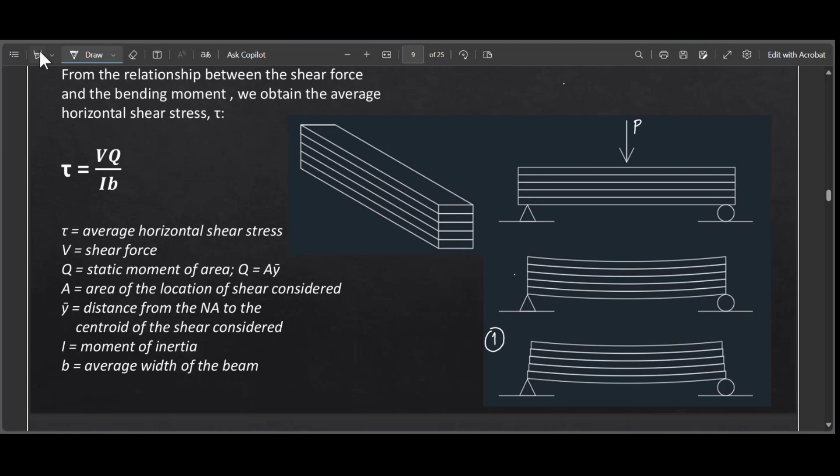Let's zoom in. The individual wood planks will resist the load independently, each on their own. They will slide over each other. If you notice here, the bending of our planks is not even because they are just sliding over each other. Therefore, there is no resistance between them since there's no glue. Since there's no resistance, there is little or no shear transfer between each layer because they are not bonded.

In the second scenario, let's now put glue on the wood planks. Now that you've added glue, they will act as a single entity, like a solid beam. So the glue transfers the horizontal shear between the layers. It bends now.

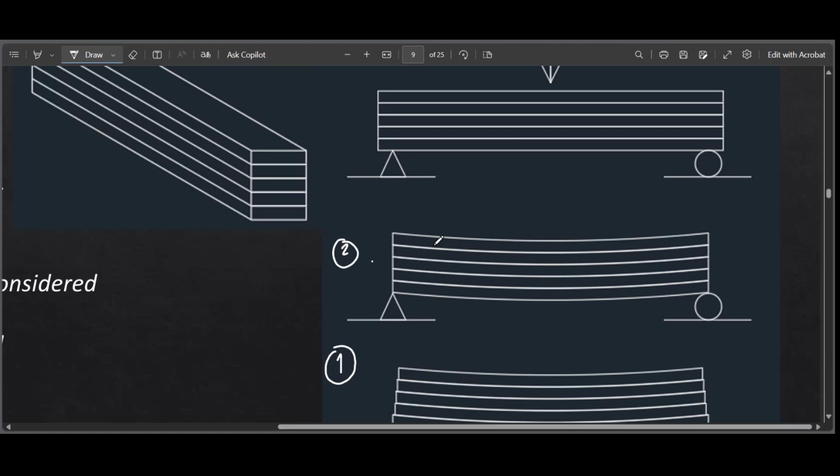Since they are glued to each other, the load is transferred to the wood planks, and there will be resistance between these planks because of the glue. Therefore, with resistance between the layers, we now have what we call stress, or shear stress. This will act as a single solid beam, and the glue transfers the horizontal shear between the layers. So in practice, it's more advisable to use solid sections compared to built-up sections because of these scenarios.

If we say solid beam, for example we have an I-beam or wide flange, it acts as a single entity, so it is solid, made as a solid. If we say built-up, there's a connection between the flange and the web.

For example, here you use a plate for the flange and another plate for the web, and another plate for the bottom flange. This is what we call a built-up connection. So there is a connection or an interface between the flange and the web. To make sure this section is strong, the connection must be well-designed.

This is so it doesn't slide or slip. Because if there's sliding or slipping, there is no shear transfer when we apply loading. Unlike when it's solid, it will act as a single entity, so the material will resist the shear as a solid, what we call a monolithic unit.

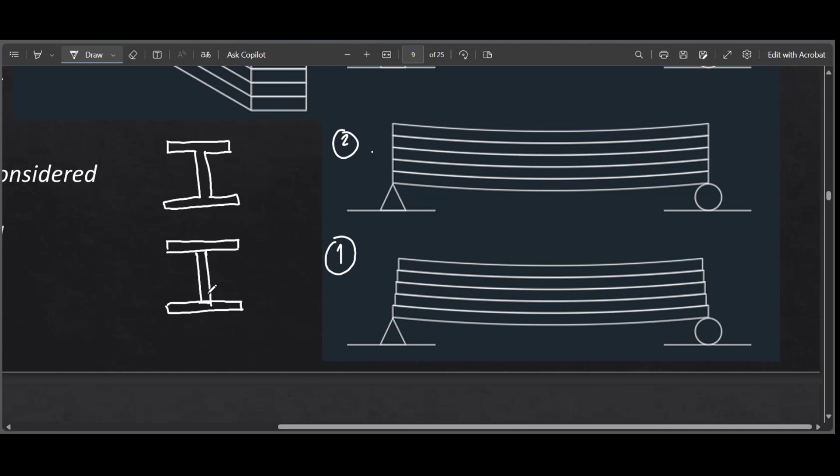I'm not saying it's not allowed to use built-up sections. We just need to make sure that the connections, usually welded, are well-connected so that when we apply loading, they are able to resist any sliding. The problem is, if it's not well-connected, once you apply force, it will slip or slide. There will be sliding in these parts. So that's what we call horizontal shear stresses at these interfaces.

Now, what about what we call vertical shear stress?

So, yung vertical shear stress, yun yung typical, di ba? Naglagay ka ng load dyan, force P. Kailangan niya ng magre-resist for that sliding. So, yan yung vertical shear force. Therefore, pag merong shear force dito, matik meron dyang stress, shear stress.

So, vertical shear stress. Pag horizontal shear stress naman, dito, yung mga nag-a-act between the layers. Okay? So, those are the two types of shear stress in our beam.

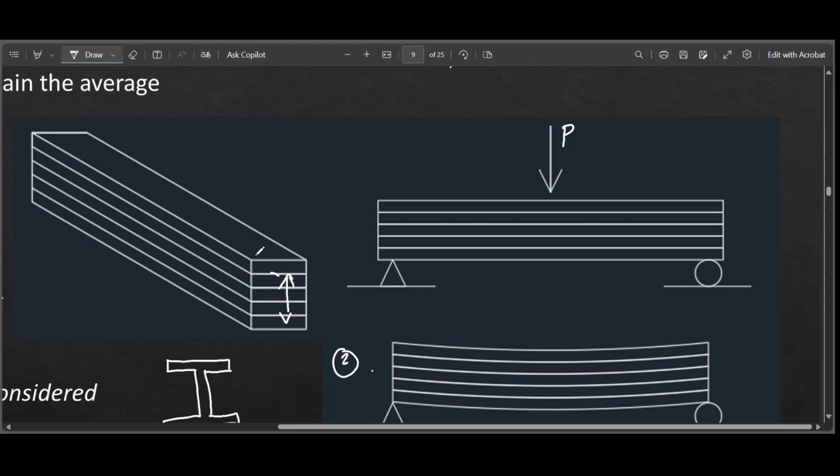Okay, so through derivation, nagkaroon po tayo dito ng equation or formula na gagamitin natin to compute for the average horizontal shear stress in the beam. Okay, so nanggaling po to sa integration. So hindi ko na po i-discuss.

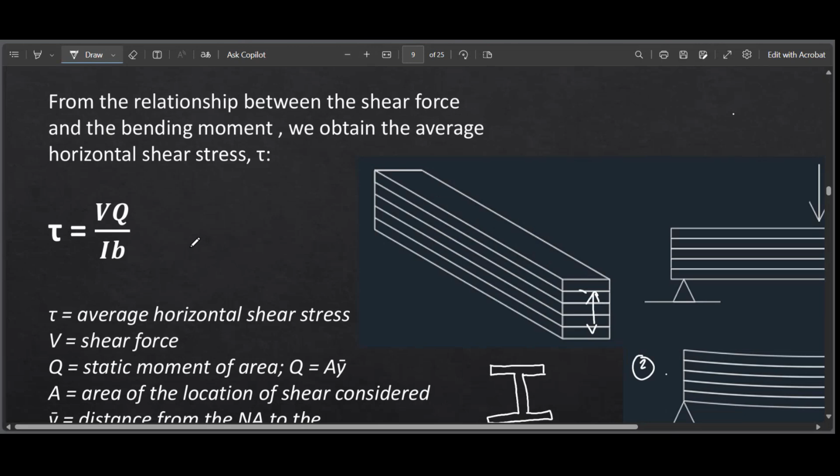So, we have here the average horizontal shear stress formula, or the shear stress formula for simplicity. It is equal to the shear force multiplied by the static moment of area, on which yung Q natin, the static moment of area, is equal to AY bar.

So, A here is the area of the location of the shear considered, and Y bar is the distance from the neutral axis to the centroid of the shear considered.

Okay, so kunwari, ito, gusto nating makuha yung horizontal shear stress dito sa part na to, dito. Ayan, so ang gagawin natin is, sige, drawing natin, sige, dito na lang.

So, kunwari, gusto nating kukunin yung horizontal shear stress on this part. Okay, so ang gagawin natin dito is to consider muna kung nasaan yung neutral axis. So, around here. Yan, neutral axis.

So, since ito yung kino-consider natin na area, shade natin yan. Okay, from that point, tapos dun sa taas niya. And then, if we want to get the static moment of area, we just need to multiply the area of this one. Ito, area, this shaded area.

So, from this point, dun sa taas niya, multiplied by Y bar. So, yung Y bar natin is from the neutral axis papunta doon sa centroid nung kinukuha nating area. So, around here. Dito sa centroid niya. Okay, so yan yung Y bar. That is the static moment of area.

Okay, now pag ito naman yung gusto mong kunin ngayon, for example, dito, gusto mong kunin yung horizontal shear stress on this part. So, ang gagawin mo is to get the area of this one, area, multiplied by the Y bar.

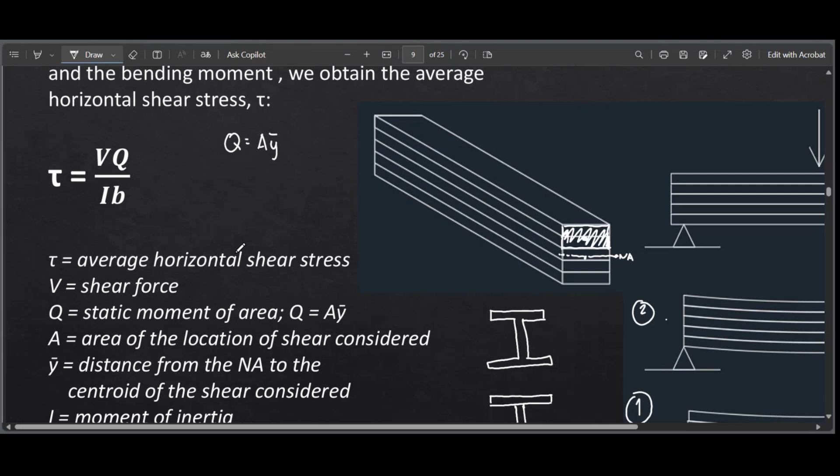Okay, now tignan natin kung paano naman yung distribution of the stress, or yung tinatawag natin na stress diagram doon sa beam natin. Okay? We know na pag flexure yung pinag-uusapan, di ba?

Pag flexure yung pinag-uusapan, ganito yung nagiging stress diagram niya. Okay? We know that the maximum stress occurs at the outermost fiber and then 0 doon sa neutral axis pag flexure. So, paano naman if shear stress yung kinukuha natin.

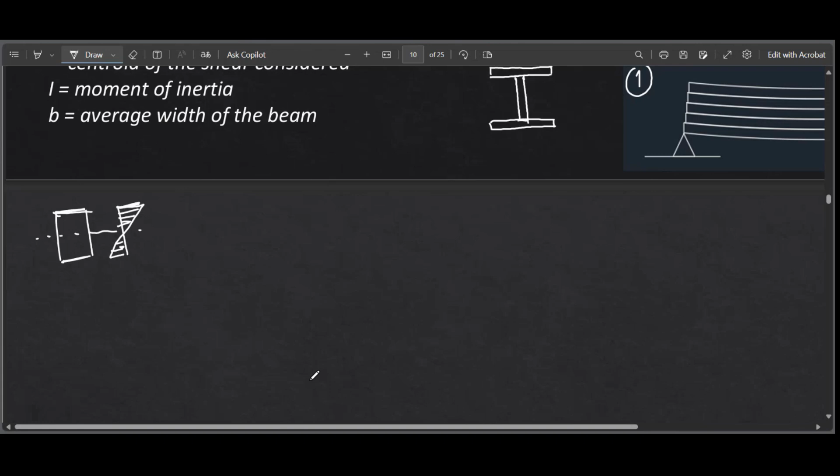Okay, so let's consider here a rectangular section. Apply natin yung formula. So, this is our base and then height. Kuha tayo ng, okay, sample dito.

Ito yung kukunin nating horizontal shear stress. Okay, so shade natin yan. Tawagin din natin ito ngayong, this is our Y.

So, yung Y, this is Y, not Y bar. Ang Y natin is from the neutral axis papunta doon sa kinukuha nating area. Okay, dito sa part na to, Y. So, this one is our H all over 2.

Okay, so apply natin ngayon yung ating formula. This is equal to VQ all over IB. Okay, so yung Q natin, sige, dito muna, VIB. So, yung Q natin is equal to

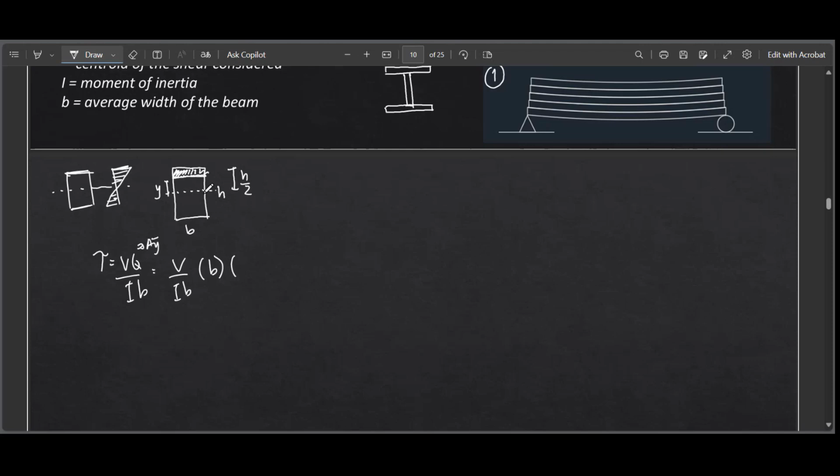AY bar. So, the area of the shaded one. So, this is B multiplied by, ano yung height niya? The height is H all over 2 minus Y. Again, H all over 2 minus Y. H all over 2 minus Y. Okay? So, that is the area.

And then, ano yung kanyang Y bar? Y bar is from the neutral axis papunta doon sa centroid ng shaded. Therefore, we have Y plus, okay, Y plus, ano yung distance na yan? We have H all over 2 minus Y divided by 2. Okay? H all over 2 minus Y divided by 2. Okay? So, yan na yung Y bar natin. Okay? So, let's simplify.

So pwede na nating i-cancel to ngayon. Tapos pwede nating ilabas yung 2. This one, the denominator, so V all over 2I. And then ayusin natin yung mga natira sa loob. We have H all over 2 minus Y, and then we have here Y plus

Wait lang, hindi pala pwedeng i-direct. Hindi pala siya kasama doon. Wait lang, hindi pa natin pwedeng ilabas ng basta-basta si 2. Ayusin muna natin yung fourth term.

This one, simplify natin ito. So simplify muna natin to. So magiging 2y plus h all over 2 minus y, right? Divided by 2. Tsaka natin ngayon ilalabas yung 2.

So magiging v all over 2i multiplied by, cancel na yung b dyan. So we have h all over 2 minus y. And then natira yung numerator, we have 2y minus y, so y plus h all over 2.

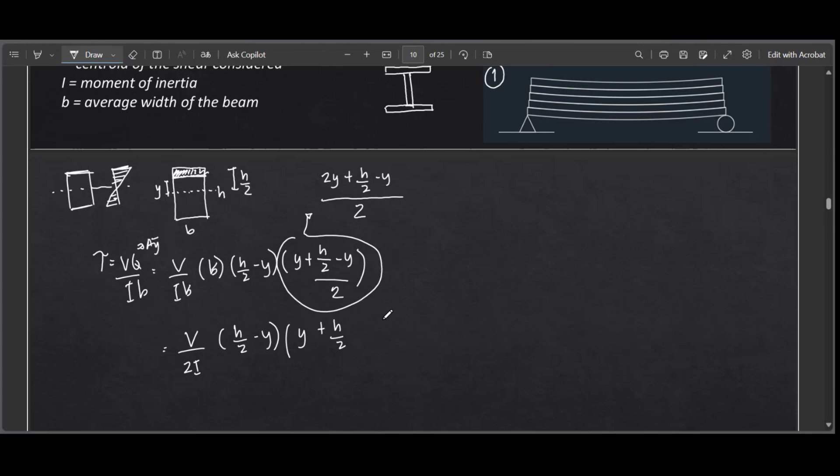Okay, sige, ayusin natin para same. So magiging v all over 2i. Ayusin lang natin, we have negative y plus h all over 2, tapos y plus h all over 2.

Okay, so distribute natin or expand natin yan. So magiging negative y squared plus hy all over 2 minus hy all over 2 plus h squared all over 4. Okay, so cancel out yan. Cancel out, therefore magiging v all over 2i multiplied by h squared all over 4 minus y squared.

Okay, so the term in y is in squared. Ibig sabihin, the stress varies parabolically sa section natin. Okay, again, the term in y is in square. Ibig sabihin, the stress varies parabolically sa section.

So, if i-drawing natin yung magiging stress diagram in terms of shear, ganito po yung mangyayari. Okay, so from this point, drawing natin dyan. So parabolically, ibig sabihin parabola, okay? So ganyan yung magiging stress diagram.

Ibig sabihin, the maximum shear stress will occur at, saan? Sa may neutral axis, dito natin makikita yung maximum shear stress. And then, habang lumalayo tayo sa neutral axis, lumiliit din yung ating shear stress. Okay, bakit? Okay, so tingnan natin.

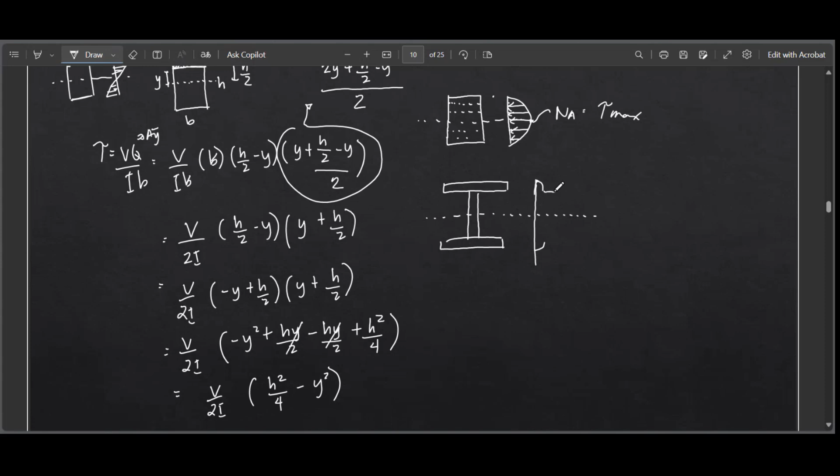Okay, kaya yung magiging stress diagram of our I section. Okay, so yung mga I-beams natin, they are perfectly manufactured to resist bending. Yung flange niya will resist the bending. And then, yung kanyang web will resist the shear stress.

Pero yung ating rectangular sections, yun nga, as we have discussed doon sa previous topics, they are inefficient in terms of bending, but the design is good for shear. Okay, kasi alam natin na dito sa may neutral axis, doon nangyayari yung maximum shear stress.

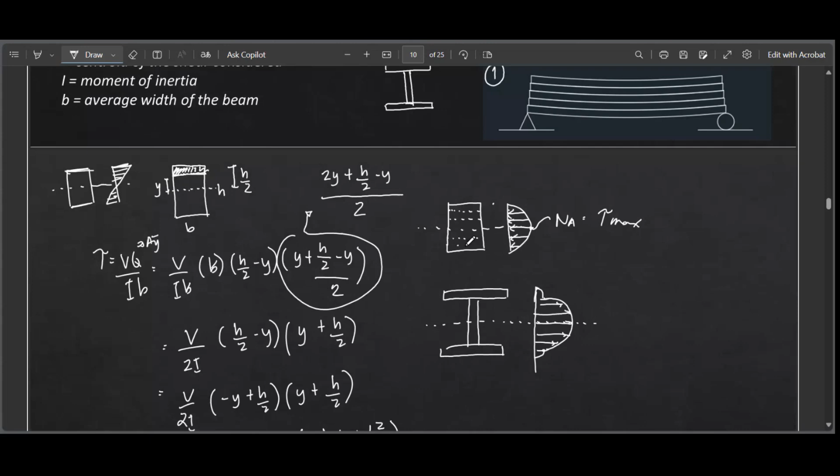Okay, and then we also have specific formula na pwede natin gamitin sa rectangles. Okay, so ito kasi yung general formula, pwede niyang gamitin for any section, but there is a specific equation for rectangle. Okay, so let's have here a rectangular section. Ayan, so kung gusto natin kunin yung maximum shear stress, alam na natin na nasa neutral axis yan, di ba? So ang i-consider ngayon natin na area is ito.

Because of the illustration we mentioned earlier, the maximum shear stress will happen at the neutral axis. So this is the area we'll consider now. We have B times H all over 2. So let's apply VQ all over IB.

So we have V, and Q is AY bar. What's the area? We have B multiplied by H all over 2. And then Y bar now is from this point going to here, that is H all over 2 divided by 2, or in other words, H all over 4.

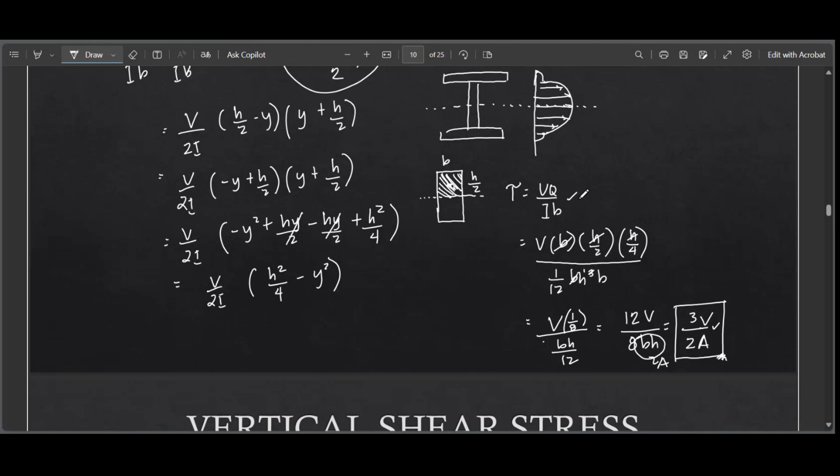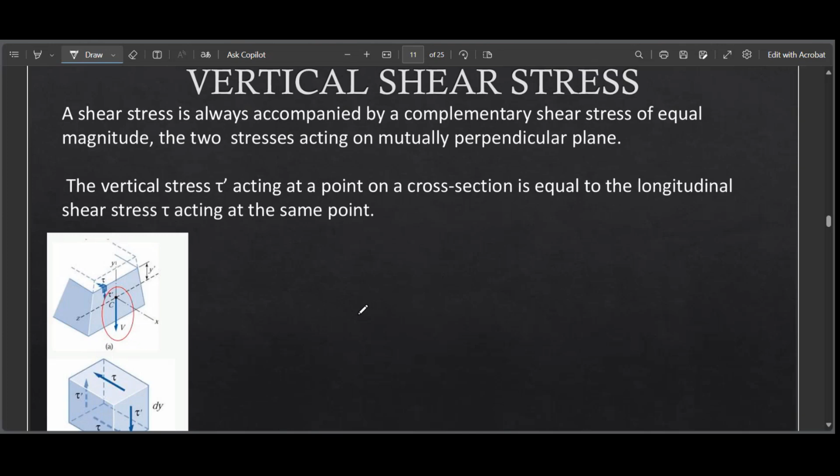So let's proceed to vertical shear stress. A shear stress is always accompanied by a complementary shear stress of equal magnitude. The two stresses act on mutually perpendicular planes. And the vertical stress tau prime acting at a point on a cross section is equal to the longitudinal shear stress tau acting at the same point. Let's explain that through this simple illustration.

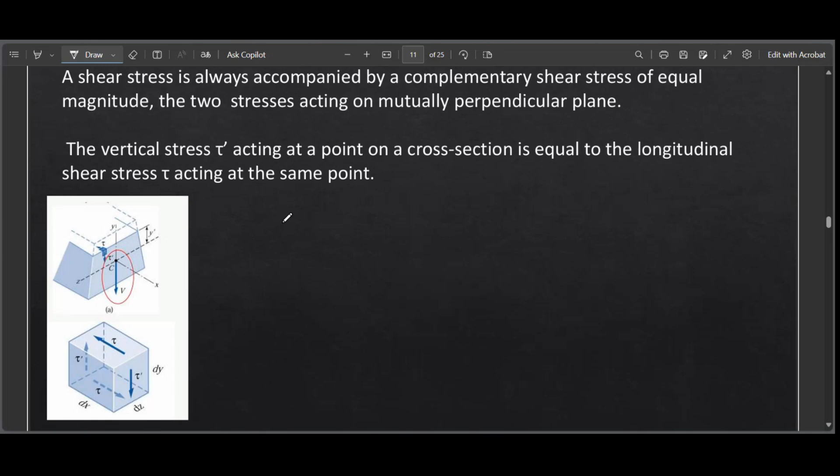So we have here a section of the beam, and we have a shear force. Let's take a sample, a small differential sample from our section. Here it is, let's zoom in, this is what we'll see. A vertical force is applied here, so automatically we have a vertical shear stress. Let's simplify this so we understand better, since we'll derive here the relationship of horizontal shear stress with vertical shear stress.

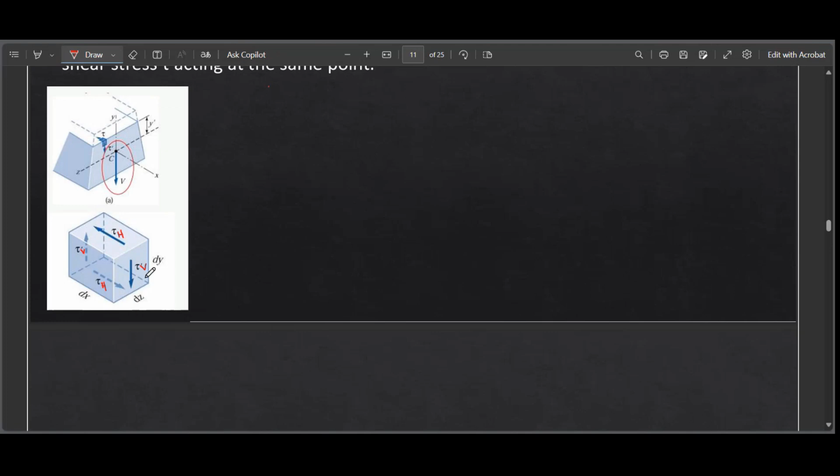Let's call this tau V for vertical, and tau H for horizontal shear stress. Since we want to maintain equilibrium, there should be a force here that is different in direction. And we also have here a horizontal shear stress, of course they differ in direction.

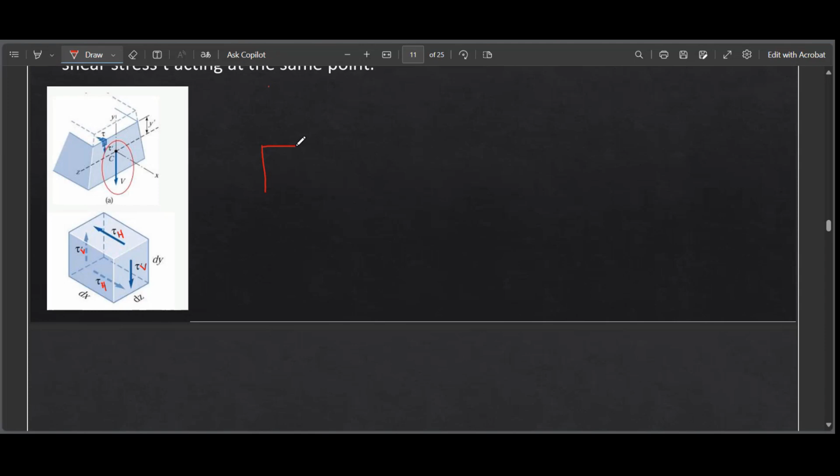Let's convert this to a stress block. That's called a stress block. Let's convert the stress block into their respective forces. Stress is equal to V over A, right? So we have stress, I need to convert it into the vertical force, or I mean the shear force. So the formula becomes tau multiplied by the area.

Let's start here. We have the horizontal shear stress multiplied by the area that is parallel to this one. Here are the dimensions: dx, this is dy, and this is dz. So what's the area parallel to our horizontal shear stress? We have dx multiplied by dz. Of course these are the same here, just different in direction.

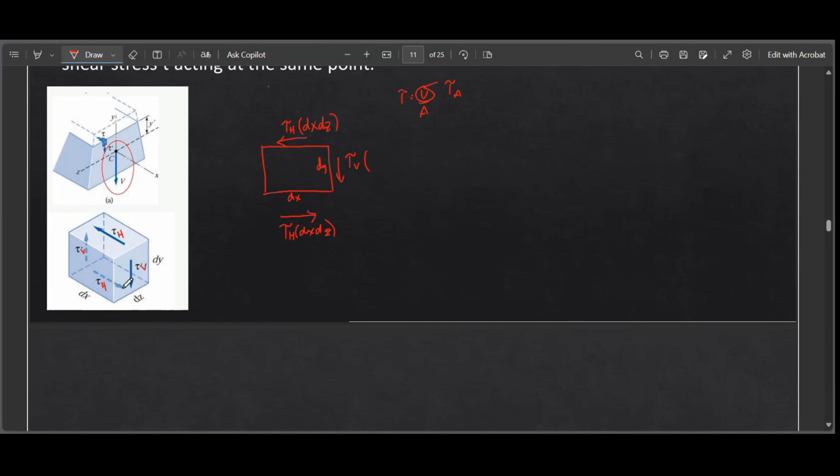Next, for the vertical shear stress, we have tau V multiplied by the area parallel to this one, which is dy, dz. And of course, same here.

Okay, so let's take a moment at any point dito sa ating block. Kunwari, kukuha ko dito ng point A. Pwede rin dito, dyan, or anywhere. Basta meron kayong reference point.

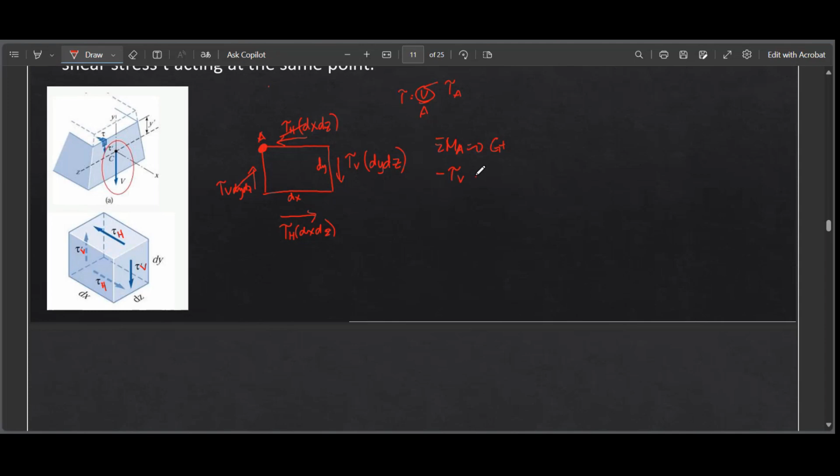Okay, so kunin natin yung moment dyan. Summation of moment at point A is equal to 0. Counterclockwise positive, so automatic magka-cancel na yan, di ba? Magka-cancel yan, so meron tayong natitirang dalawa. So unahin natin ito. We have negative tau v multiplied by dy dz. Ano yung kanyang moment arm?

We have dx. And then this one, plus tau h dx dz, moment arm is dy, is equal to 0. Okay, so transpose natin sa kabila yung isa. So we have tau h dx dz dy is equal to tau v dy dz dx. Okay, so kung makapansin nyo, parehas lang ito, di ba?

Ayan, no? dy dz dx. dy dz dx, parehas sila. So we can cancel it out. Therefore, our horizontal shear stress is just equal to our vertical shear stress. Okay, so parehas lang po yung value ng magiging horizontal shear stress natin versus the vertical shear stress.

Okay. Basta yung vertical shear stress, it is often caused by external shear forces, and na-observe natin siya sa cross-section. Okay, and yung sa horizontal shear stress naman, usually nag-act siya parallel to the beam length or doon sa mga interfaces ng mga fibers. Okay, so internal distribution of shear naman yung na-experience yan, and yun nga, it occurs at the interfaces between the beam layers. But overall, parehas yung magiging value of the shear stress, vertical and horizontal.

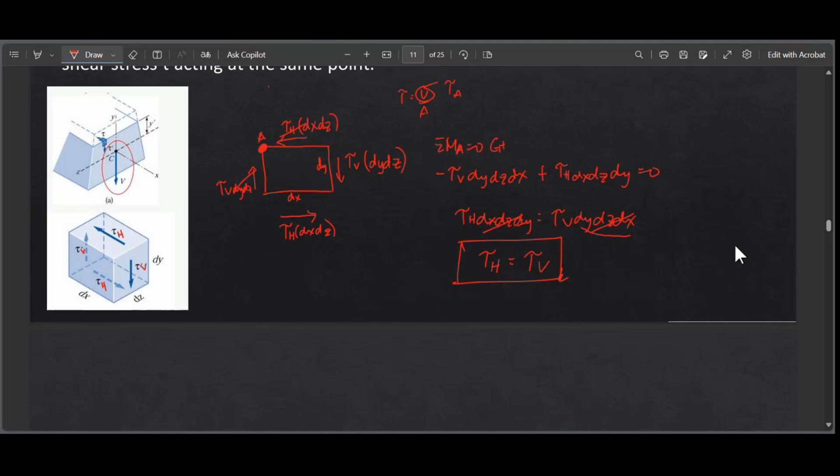Okay, so let's proceed now to the limitations of the shear stress formula. Okay, so the shear stress formula predicts that the largest shear stress in a prismatic beam occurs at the cross-section that carries the largest vertical shear force, V.

Okay, so yung VQ all over IB natin, ang gagamitin nating V dito is the largest vertical shear force, or yung Vmax. Okay, naaral naman na natin yan sa chapter 4, usually the shear or the maximum shear stress occurs at the support. Okay, at the support or near the support.

Okay, so the location or the value of Y of the maximum shear stress within that section is determined by the ratio of Q all over B. Q is always maximum at Y is equal to 0. The neutral axis is usually a candidate for the location of the maximum shear stress.

Okay, nasabi natin kanina na yung ating maximum shear stress will happen at the neutral axis. Therefore, yung Q na gagamitin natin is at the largest, kasi ito na po yung Q, di ba? So ito na yung pinaka-maximum na area na po pwede natin i-consider.

Okay, and then however, if the width B of the neutral axis is larger than at the other parts of the cross-section, it is necessary to compute tau at 2 or more values of Y before its maximum value can be determined. Okay, so very specific to doon sa mga built-up section. Ito yung mga sections na hindi pantay-pantay or hindi pare-parehas yung magiging width of the beam. So pag ganon, we need to consider 2 or more locations ng possible location of those maximum shear stress.

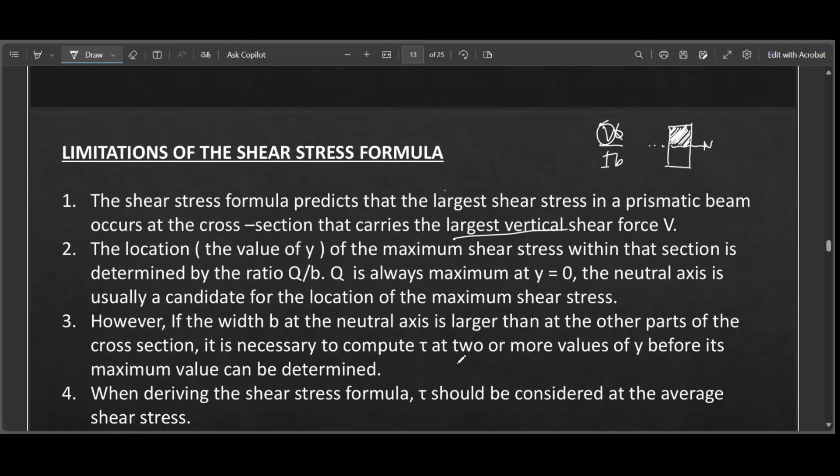Okay, so for number 4, when deriving the shear stress formula, tau should be considered at the average shear stress. And then the shear stress formula is sufficiently accurate for rectangular cross sections and for cross sections that are composed of rectangles such as W and S shapes. For other cross-sectional shapes, the formula must be applied with caution.

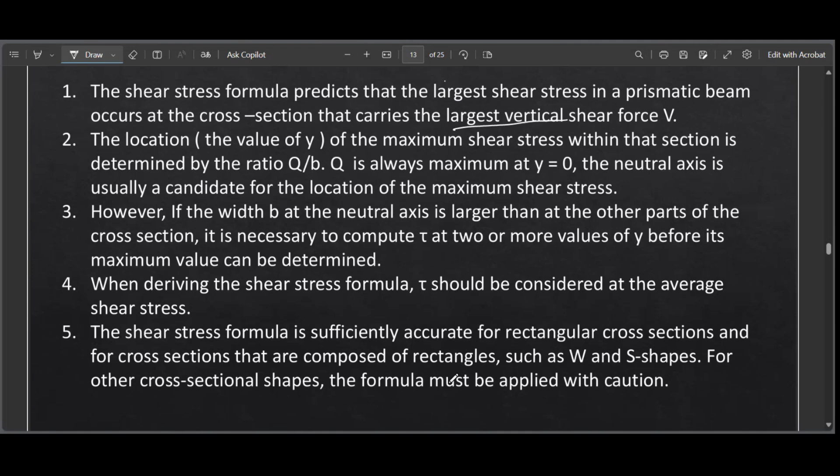Okay, so yung shear stress formula is well-designed for rectangular and then sa mga regular shapes natin that are composed of rectangles. But then again, we can also use that for any other cross-sectional shape. Basta tignan natin ng maayos kung saan yung maximum V or maximum stress na mangyayari, kasi iba-iba sila ng width B. Okay, i-determine natin yan mamaya sa example.

So we have here a simple procedure for the analysis of the shear stress. For number 1, use equilibrium analysis to determine the vertical shear force V. Okay, so isulat muna natin yung equation.

So, the average horizontal shear stress is equal to VQ over IB. Use equilibrium analysis to determine the vertical shear force acting on the cross-section containing the specified point.

Using the shear diagram, or if you're already familiar with the exact location of the maximum shear force, then you may also use a section.

Locate the neutral axis and compute the moment of inertia of the cross-sectional area about the neutral axis. Then compute the first moment Q of the cross-sectional area that lies above or below the specified point.

So Q is equal to A times Y bar, that lies below or above the specified point.

If we have a rectangular section, this is the neutral axis. This is the stress diagram. The stress is the same here compared to the one below, as long as they have the same Y bar - same as with flexural stress. So whatever the stress is here, as long as it's the same distance Y, it's the same. So you can consider the area above or below - it's up to you.

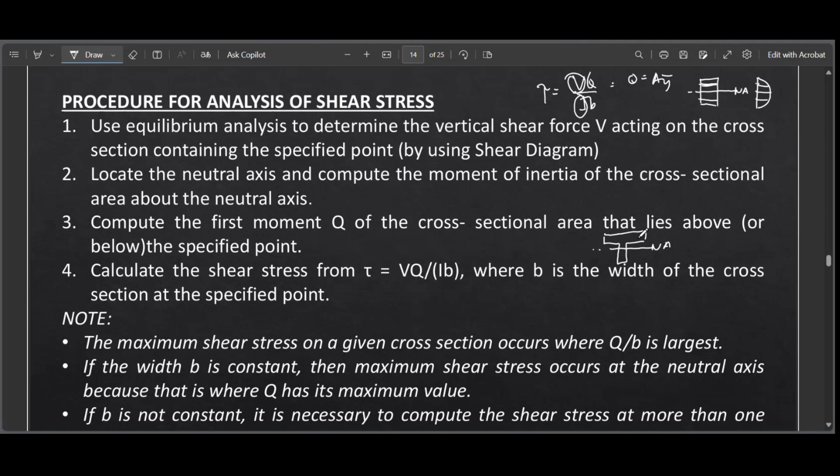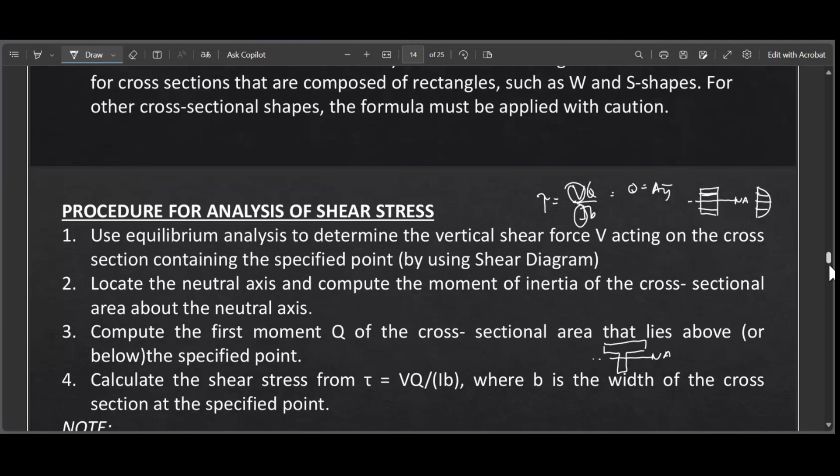We have here some reminders to consider. Number 1: the maximum shear stress on a given cross-section occurs where Q over B is largest - usually the ratio that gives the biggest value is where maximum shear stress occurs. And if the width B is constant, then maximum shear stress occurs at the neutral axis because that is where Q has its maximum value.

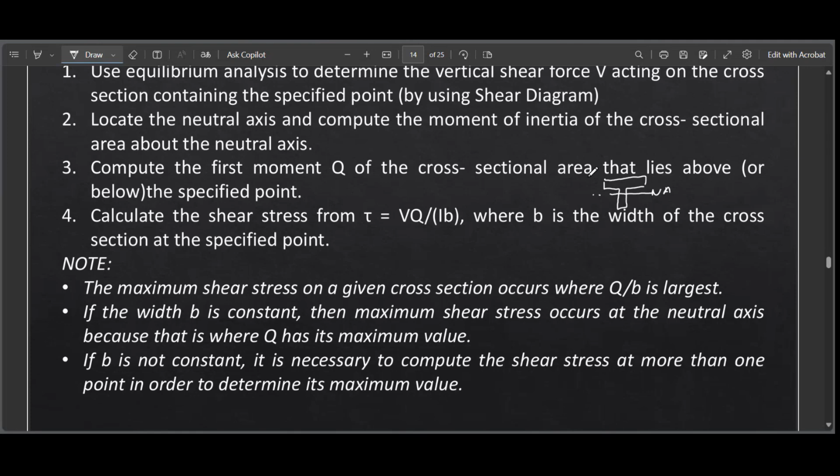And if B is not constant, it is necessary to compute the shear stress at more than one point in order to determine its maximum value. So that's it - let's have now our sample problem 1.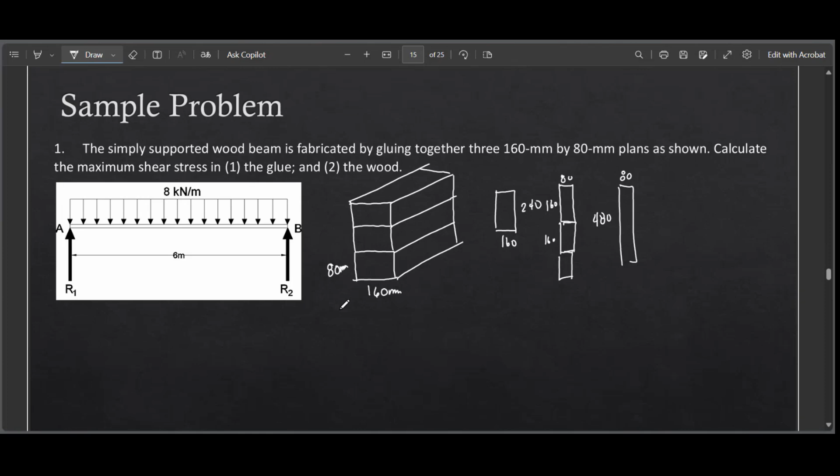Now we're asked to find the maximum shear stress at the glue - meaning at this part where we'll place the glue, on this side or that side. And the wood - meaning we'll consider it as a whole entity. Let's start with the first one, the shear stress at the glue. Our formula is tau equals VQ over IB.

So we need to determine the maximum shear force, Vmax. We have here the reaction - what is the reaction there?

Again, this is a simply supported beam with uniformly distributed load. So we divide the load equally. 8 kilonewton per meter multiplied by 6, so 48 divided by 2, giving us 24 kilonewton, 24 kilonewton.

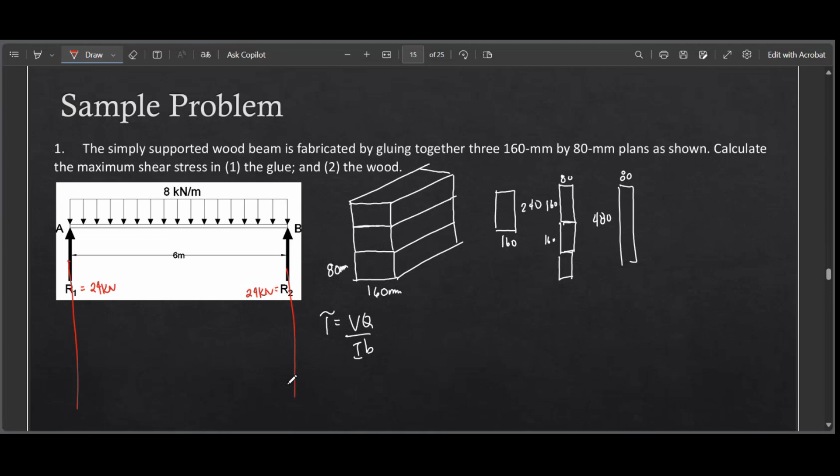So let's draw the shear diagram. Actually we already know where Vmax will happen - it will occur most of the time at the support. That's 24, right? But let's prove it. So we have 24 kilo.

Is there any vertical? Yes, 24. And then is there any area? Yes, we have 24 minus the rectangle, 8 multiplied by 6, which gives negative 24, negative 24. And then is there any vertical force? Yes, we have 0.

So this is the shear diagram. Now determine the Vmax. The Vmax is equal to 24 kilonewton. Ma'am, do we need to show the shear diagram when it's like this? Not really needed, because we already know the maximum shear force will most probably occur near the support or at the support. But if it's not typical loading, then you need to draw the shear diagram.

Okay, we have V. Next is Q. V is 24 kilonewton, so 24 kilonewton times 10 raised to 3 newton. Okay, Q - what is our Q? Q is equal to A times Y bar.

What are we considering? The shear stress at the glue. So this is it. First we need to find the neutral axis. So this is the neutral axis. And here, this part, is where we're looking for the shear stress. So our rule is to consider the area above what we're considering. So that's our A. And what is Y bar? Y bar is from the neutral axis to the centroid of the area we're considering.

So what is the area? We have 160 multiplied by 80. The Y bar, from this point to there, we have 40, half of 80. Plus, here, we also have 40.

So now you have Q, all in millimeters. And then our I, moment of inertia, is 1 over 12. Base is 160, height is 240 cubed, so we have 240 cubed - that's BH cubed. And then our base, what we consider as B, is 160, all in millimeters raised to 4.

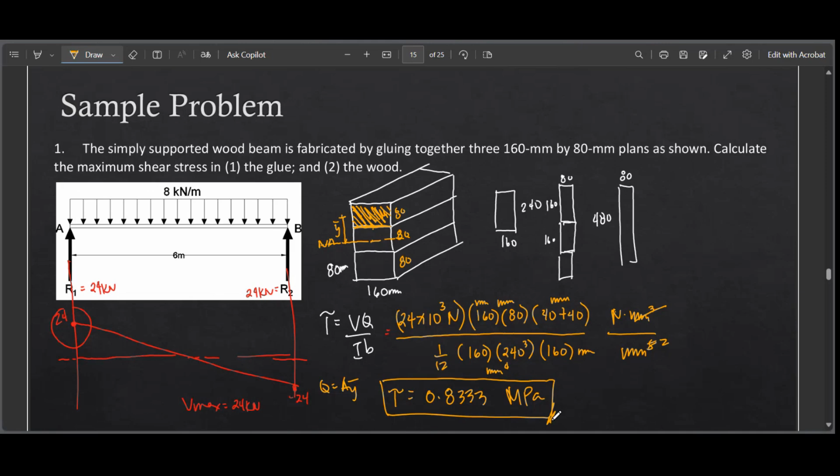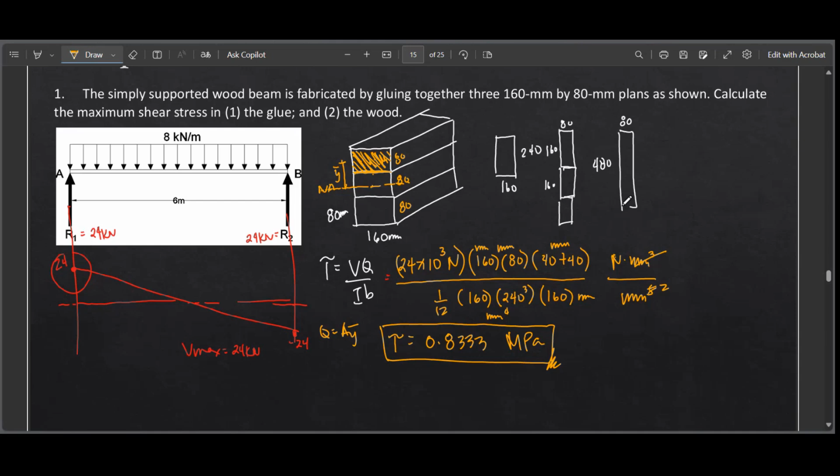Next, in the wood - meaning we will consider it as a whole entity. Let me draw the illustration here. So this is 160 and then 240, as a whole entity. This is the neutral axis. So we have VQ over IB.

We will use the same value of shear force, Vmax still. So we have 24 times 10 raised to 3 Newton. Now what is our Q? Since we're considering it as a whole entity, we said the maximum shear stress will happen at the neutral axis. So from this point, this is the area you need to find the horizontal shear stress for, and consider the area above it - it's either area above or below, same result. So we have 160 multiplied by 240 divided by 2, giving us 120.

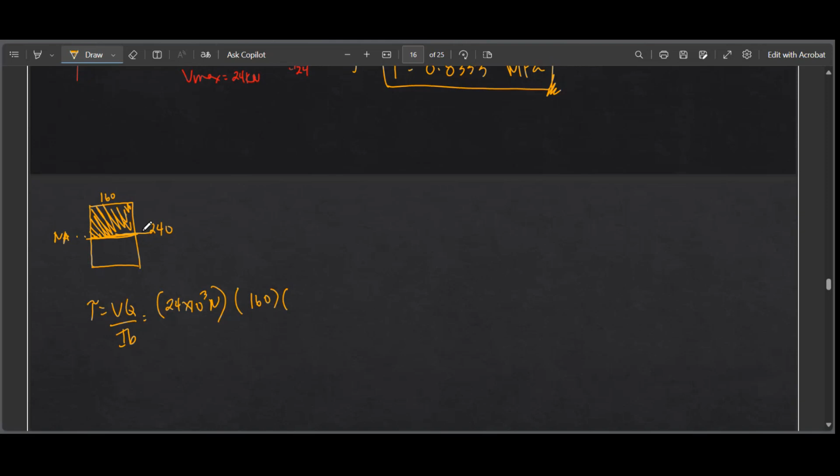That's your area. Y bar is from this point to there - how much is that? 120 divided by 2. This is the 120, 120. So 120 divided by 2, we have 60.

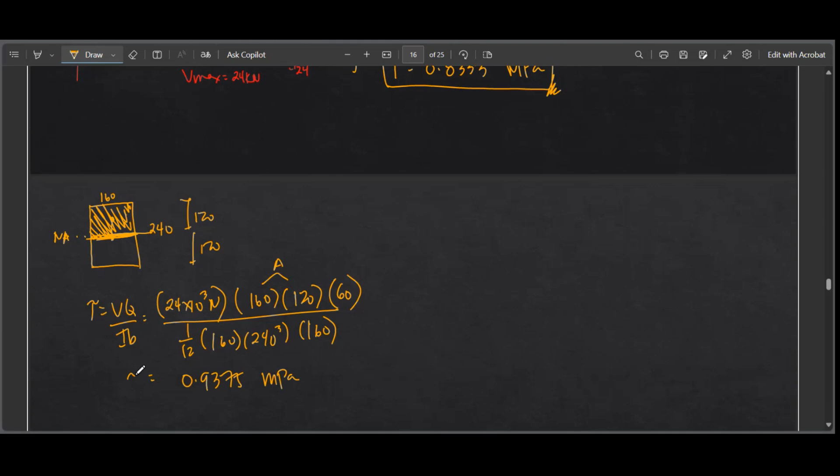And our I is still the same, 1 over 12, 160 by 240 cubed multiplied by your B here, 160. Therefore we have 0.9375 megapascal.